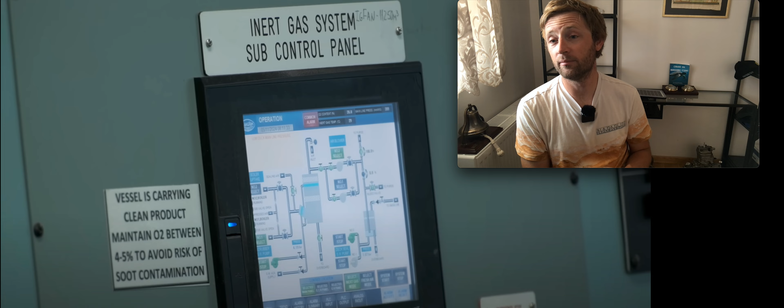So let's quickly start. These are the things you should take care of when doing power management. First of all, you need to check which kind of conditions you are operating in - is it bad weather conditions, or is it calm weather conditions - and how you can adjust your system in order to reduce the load and the consumption.

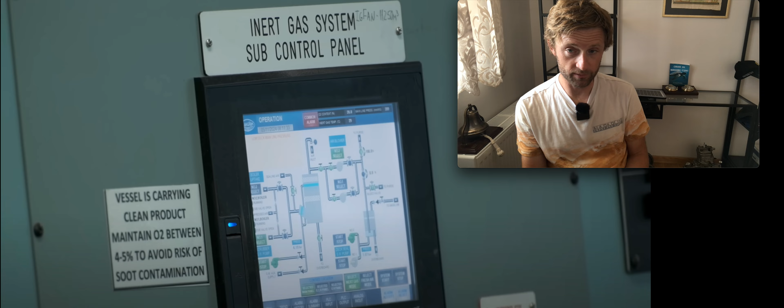I have successfully implemented power management in my household, and I have reduced the consumption by around 50 to 60%. First of all, power management starts by identifying which resources are the consumers, and also the supply units that we have. It's really important - the power management system, the power supply, and the consumers are specifically calculated, and this also starts from the design, from the vessel design.

For sure, the vessel has to meet some specific parameters while sailing - catching the speed, supplying the proper air in the engine room, because if you don't have air to the engine room, how will your engine breathe?

So there are different things you can do, and through the years and through my knowledge, I can do things you can never imagine. I can share even more things, but for those things, the companies need to pay, okay? But for you, my dear friends, I will set it scale-wise, level-wise, so you can choose which level you prefer to join.

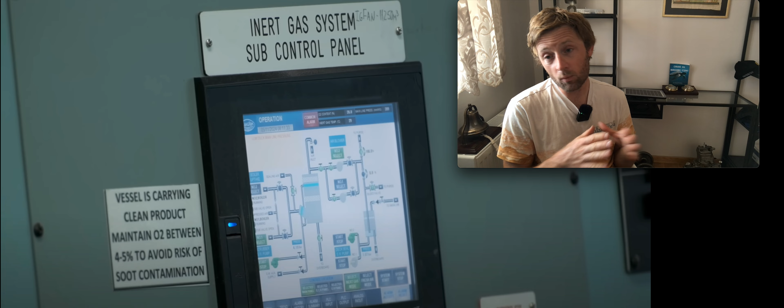This is my main goal and also my main work at the moment. So I'm not working for any other organization, I'm not supported by any other company. I'm working for myself through YouTube.

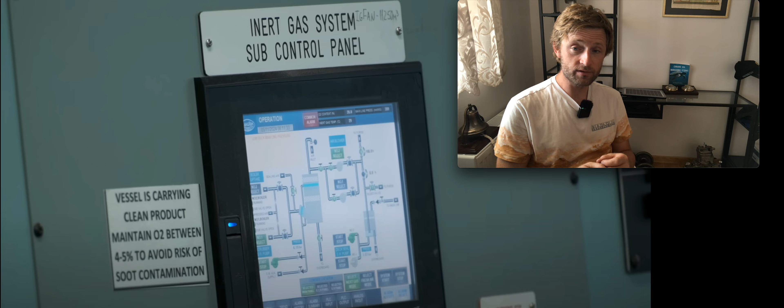I believe this is the most advanced thing, working from YouTube, because YouTube gives transparency to the people. If it is not YouTube, you can find me through the phone, through the website, through the connection. If there is no Google, you are still able to find me somewhere around, through my phone, through my mail.

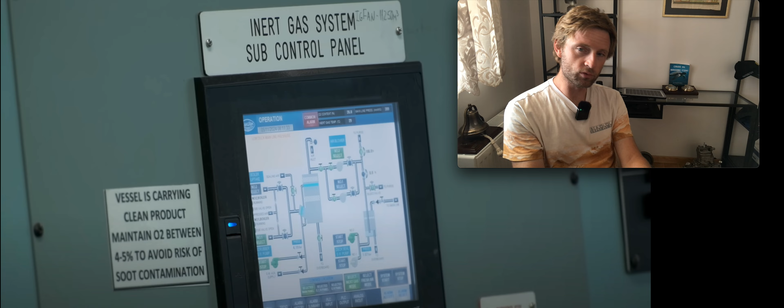Let's go to the power management system. It's really important to balance all the things. And why is it so important?

Because if you have a generator designed to generate 1000 kilowatts per hour, and you are using only 150 or 200, you basically destroy your engine, because your engine is working in low mode. There is no sufficient load, the air is barely flowing through your engine, and you do not have charging. So your turbocharger performance for this generator set is not in the power range that it has been designed for.

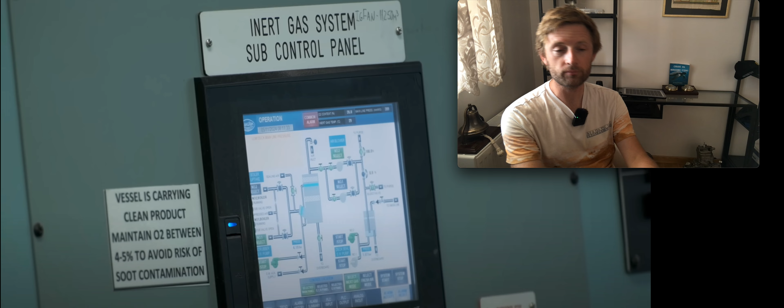And such that also the temperature of the exhaust gases increases. So basically your components receive a much higher thermal load, not just stress through the combustion process, but thermal overheating, and also a build up of deposits, like we say, soot.

That's why we should operate our engine on demand of the engine basis of the consumers. What is happening now in the vessels with power management? The vessels have remained unchanged for many decades.

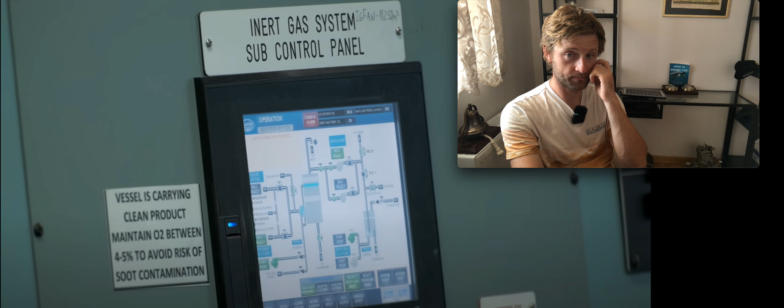The latest technology is VFD fans, frequency variable fans, that can monitor the pressure inside the engine room, and then adapt depending on the desired pressure or necessity from the boilers, from the diesel generators, from the main engine.

Yes, that dramatically reduces the load, that is true, but it also increases the expenses of investment, and later on for the maintenance, for keeping the system and all the things. So everything has to be balanced.

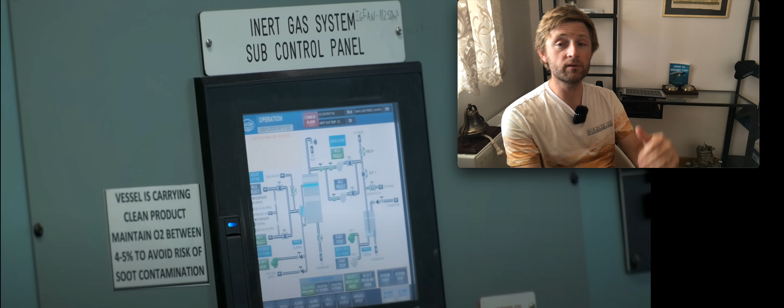The initial investment that we are doing, how much time and how many years it will take until we will have the return on investment for the systems that we have implemented.

For example, if you are using a system which is very costly, and then you need some spare parts, and the system always breaks down, shuts down, you have to tell the authorities, okay, we have this problem, this problem. This creates additional chain reaction problems in the long term.

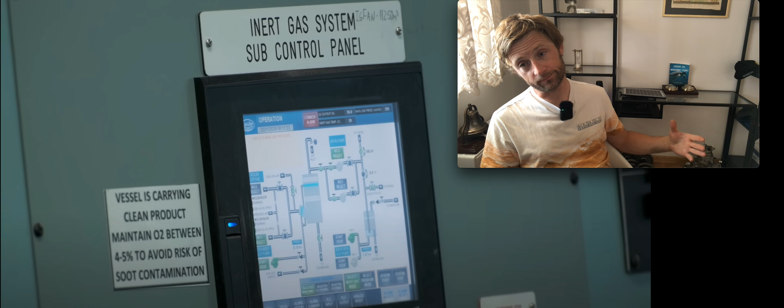That's why it's so important to design such systems that you have less things happen. What I mean by less things happen is that through the lifetime of the system, as the system operates, it will have fewer breakdowns.

This is where engineers stand for, where engineers give additional value, which the officers on deck are not able to do because their mind simply is not working as an engineer to implement things, to work through things and understand the reason why things are happening, in order to design them differently or change the design or even improve the design.

This is also one of the biggest problems nowadays for companies. Most of the companies, like big oil major companies, offices from the shipping companies, if you look inside the organizations, most of the people sitting there are captains. They are not - there are really small teams of engineers.

As I have worked for one of the oil majors, I have seen that there was a team of engineers which actually was creating value. They developed new projects, running the projects, modifying the projects, and exactly saw the technical stuff that was included. It is really a successful team, because they can directly see the problem rectified and identified much quicker.

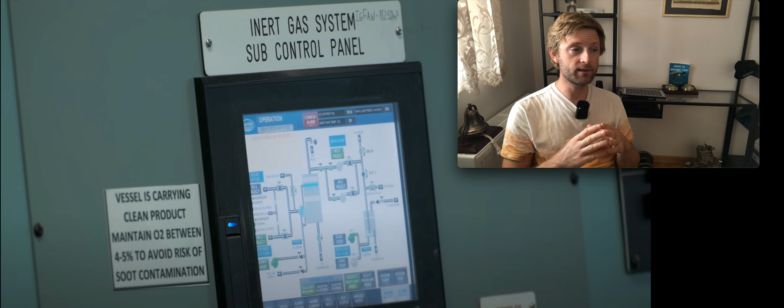So back to our power management. For many decades, the system was designed really copy-paste, and what is really missing is proper power management and attention. Basically, the power management of existing vessels says: if the load is low and you have two generators, one generator will go into shutdown mode. It will shut down. But if the operator selects to lock this feature for some reason - maybe bad weather conditions, or you need the generator on standby for departure - you will run two generators at low load for safety. But the safety is not guaranteed running two generators in parallel; even so, if you have a problem, both generators can go to blackout easily.

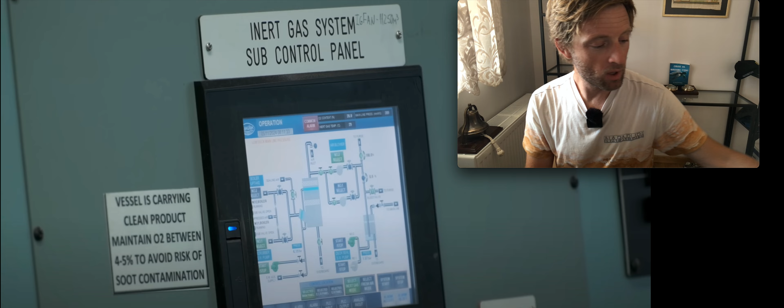That's why the most important thing is to keep your engines in good performance and good shape, so that as problems occur, you eliminate them and fix them, and do not leave the problems to continue longer and longer. A really professional approach is that when problems appear, you properly report them. What I have seen is a lot of underreporting, and this is the reason why problems continue and multiply through the years. So underreporting or overreporting - these are things that also have to be balanced.

But let's go back to our power management. Good power management, and more precise power management, comes from engineers and from deck officers, because it has to be balanced both ways - not only engineers thinking about power management, but also officers on deck, how they apply power management through vessel operation in order to keep consumption low.

For example, we did not switch on the lights during the day on deck if the visibility is good. So we also have the awareness that if I switch on this light, some generator will work and consume more. It's also the awareness part of the energy, the power management system.

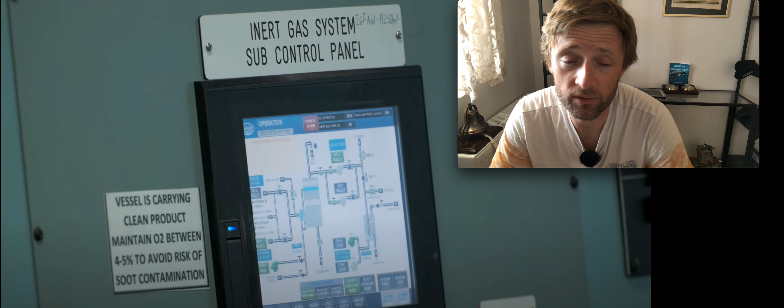And also when they're boarding the vessel, they can see the conditions, evaluate, and instruct the crew to do such things. But mostly, for power management and all the things, from my understanding, the engineers and officers should be trained, okay?

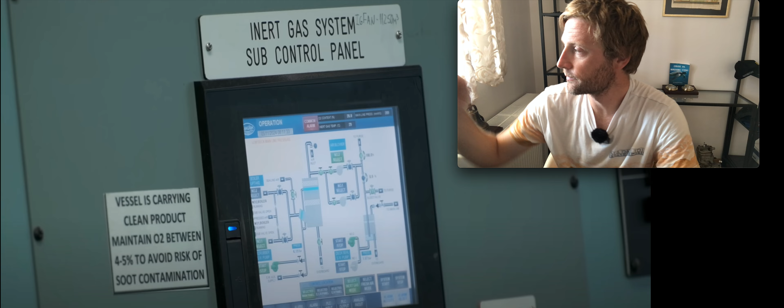And in my understanding, and also through the material that I have created through all these years, it is that engineers and officers will be trained and they will do these things by themselves. They will not wait for somebody to tell them to do these things. And this is one of the problems nowadays, because everyone waits for somebody to instruct them, to say something to them, to give them orders or write down all the things. They will not do anything by themselves.

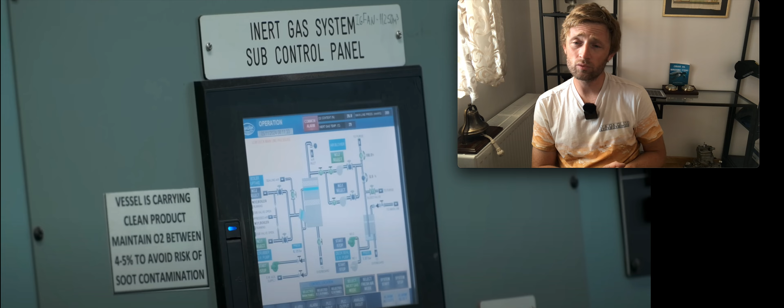And in one point it is right, because if you do something wrong, then you will get blamed. And yes, it's really nowadays, yes, it was really also before. Yes, I can remind, it's only blame culture. Okay, I have worked only with Greek companies. I don't know, but yes, the blame culture is really high in this society.

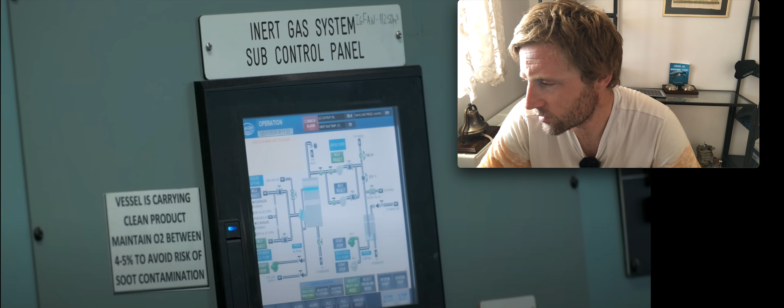And even if somebody makes a mistake, they will not accept it, or will transfer it to another person - okay, I didn't do that, okay take it here. It is also in other countries as well, I think, as nobody wants to be blamed. But in these cultures, yes, you do not have transparency, you do not have development.

It's just, let's say, surviving in the environment, surviving in the company. And in these environments, yes, you do not see something great develop, something which is motivated, which is created to last. No, in such an environment, you just do the basic and that's all. You're just keeping the system running, the system consuming the people, consuming their energy, and nothing really produced that's interesting, something that changed the way of approach to make it much easier, effortless.

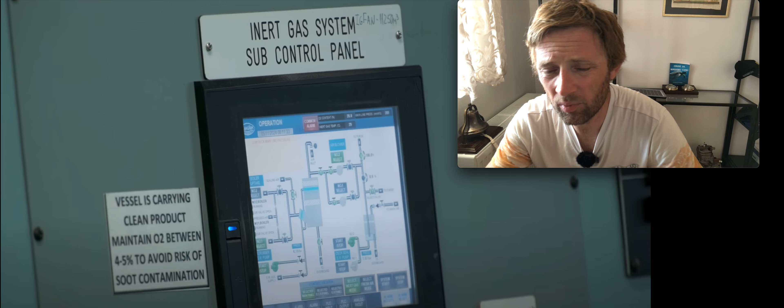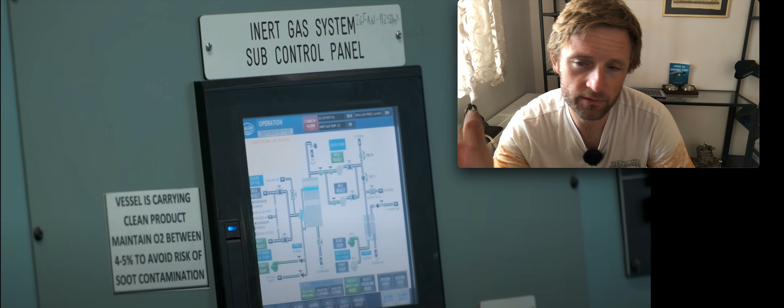I see people really working and working, making it so much more difficult than it actually is. And this is the step when you are chief engineer or captain, you need to say, no, we will not do that thing that you are saying because of this and this and this. We are not, let's say, masochists. We will do it our way, the way that we know.

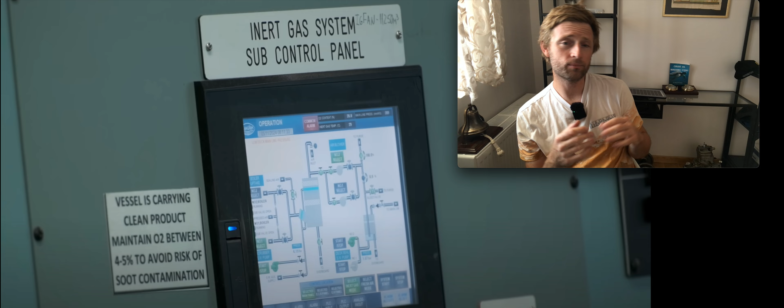So yes, this is a little bit of power management. We touch a little bit on that information, but also awareness plays a huge role in what I'm doing, for what reason I'm doing it, how our engines are designed, how much equipment I will use for that discharge or for the loading. Because on the vessel during sailing, you have different conditions: standby conditions, anchorage conditions, maneuvering conditions, at sea conditions, high speed conditions. Anchorage, good weather, bad weather, swell, rain - you have a lot of different conditions.

So think about that a little bit, how the power management is being done. And I believe not only in the marine industry, if power management is applied through all industries, it will have a really, really tremendous effect. We will directly reduce the consumption of fossil fuels, and we will directly have much cleaner air because we will have less emissions and fewer pollutants hovering in the air.